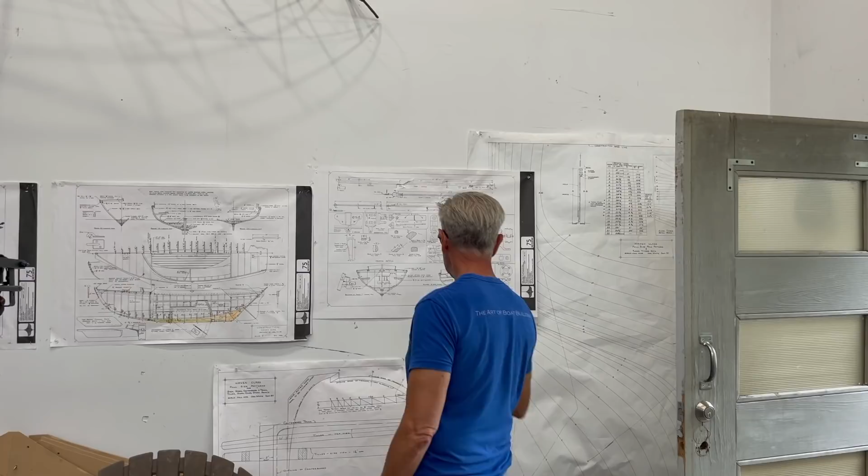So over here at the plans, there are 4 different views of the seats, and the first is here on sheet 6. We're looking forward here, and here are the seats on the front bulkhead, the seat brackets. And then over on this one, we can see where we're looking aft, and there are the seat brackets here.

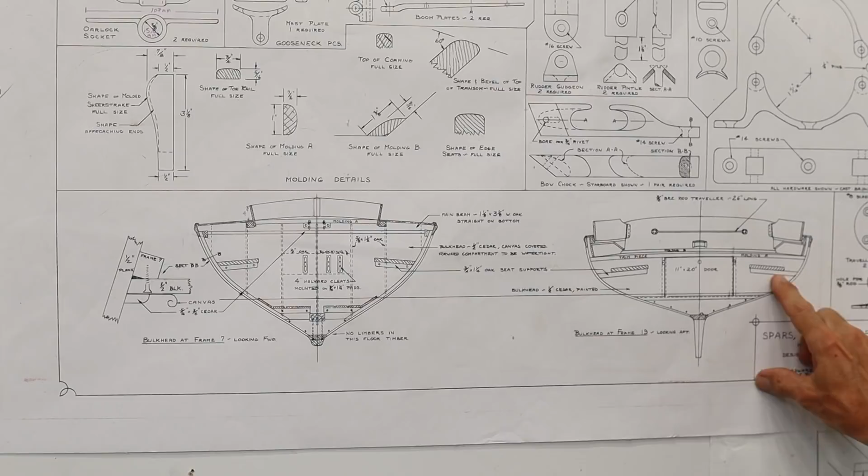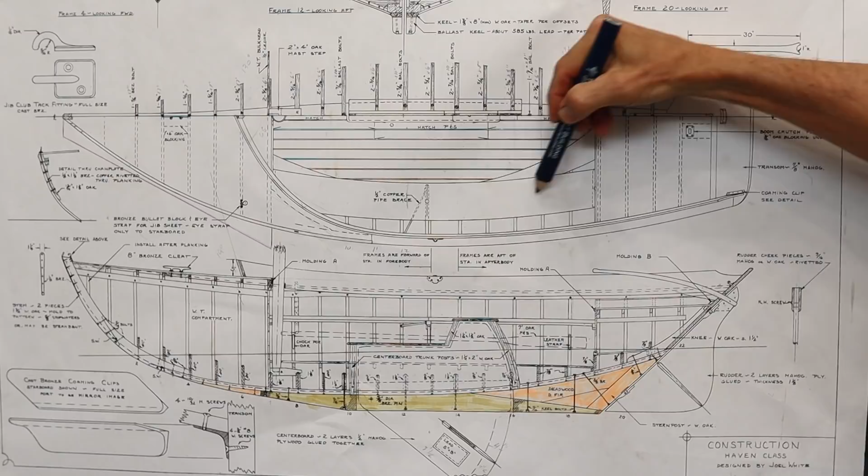The other views are here on sheet 5, and we can see the elevation of that seat. So the seats are this line that runs right across here. And then here in plan view, we can see that this is the seat that runs fore and aft.

The next view we can see is also on sheet 5, and that shows here a section at midship where it shows this bracket right here that holds the seat in the center.

Now, one of the challenges about boat building that I really enjoy is having a problem that you need to find a solution to. And so the trick here is finding the solution of this angle in reference to the hull. And in boat building, it's very hard because there really aren't a lot of right angles. So I think what I'm going to need to do is to establish some kind of a line across there that I can then measure that angle.

So the way I'm going to do that is here on the plans where it shows those brackets on the front and back bulkheads. So if we look back here at sheet 6 that shows the front bulkhead, what I've done is I've established that the floor is level, so I drew a red line here, you can see on top of the floorboards. And then what I did is I drew a line here that is the angle that the seat will be, and that reads 5 degrees.

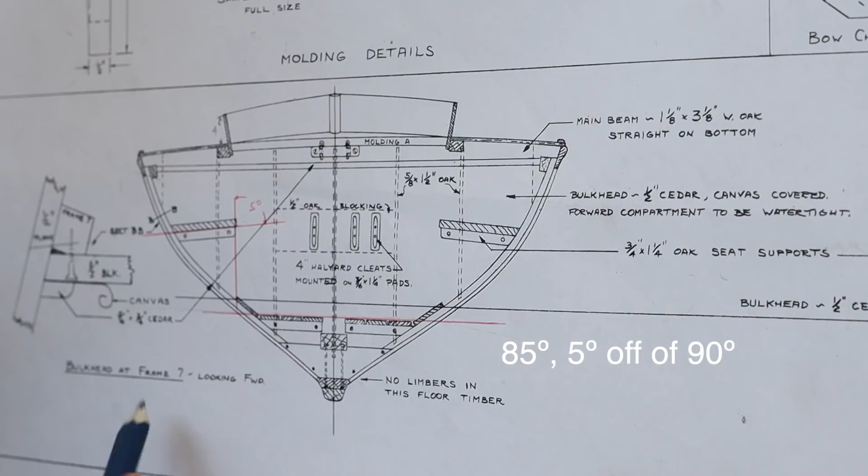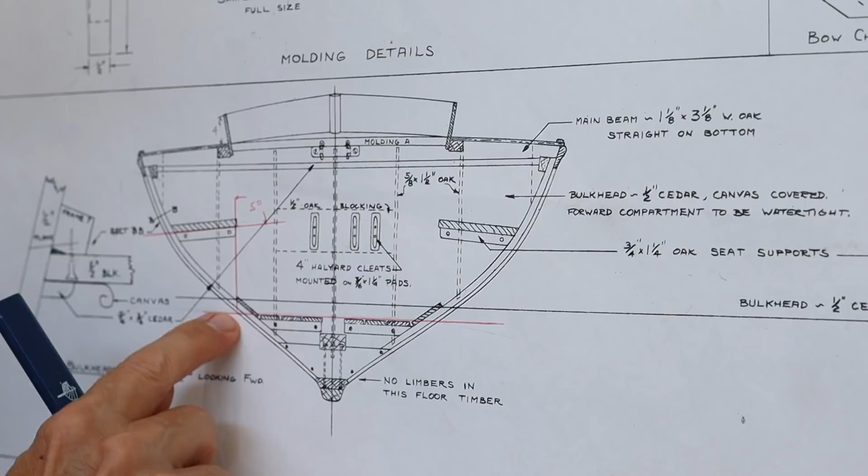So what I need to do now is to establish the distance from here to the top of that bracket, and using the 1.5 inch to a foot scale, you can see that that is 12 inches. So because the seats are parallel to the floor, that will be exactly the same on the back bulkheads as well. So what I need to do is to prepare these brackets that I can attach to both the fore and aft bulkheads. And it says here what size those need to be.

So they are 3/4 inch by 1.25 inch oak seat supports. So the first order of business then is to prepare that stock and get those attached at that 5-degree angle on the front and aft bulkheads.

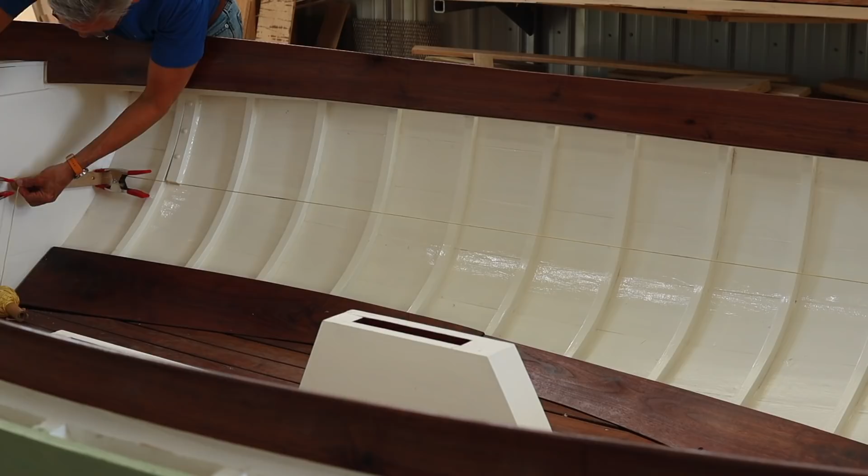So what I've done here is I've strung a couple of strings from the fore and aft seat supports in order to figure out what this angle was here in the center. So I made a template here that will measure that angle for me.

So here on this frame, it will get screwed through the top into the frame, and it'll be flush with this. And then the top of the bracket is equal to the bottom of the seat, which will sit here. And then it will get attached with screws going this direction. And then I just kind of got a general idea of what that curve should be. So now what I'm going to do is go over and work out a jig in order to make this seat bracket.

So I have my template here, and I've decided, instead of trying to steam bend a piece of oak, what I would do is laminate a seat post. And the reason for that is the pieces of oak that I have don't look very stable. And what I mean by that is, in order to make a bend that severe with a piece of 3/4 inch oak, the grain really needs to be very, very straight. And looking through my stock, I just couldn't find anything that I knew was going to be successful steam bending.

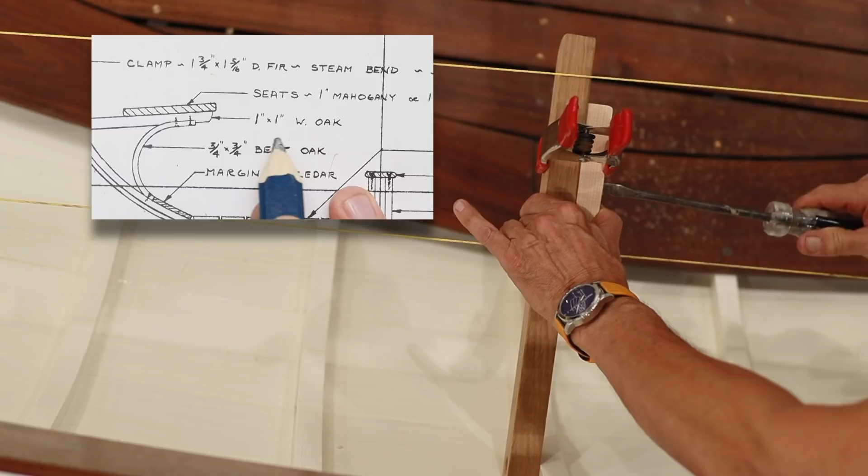Well, after I got all of the seat posts shaped and installed, the plans then called for a seat cleat that goes across midship. And the plans call for a 1-inch by 1-inch piece of oak. So I cut out a piece of that and installed it. And then it also called for a 1/2-inch piece of copper tubing to run diagonally in order to support that bracket fore and aft. So I made a piece of copper tubing up and got that installed.

So now that I've got all of that done, I've cut some really thin pieces of plywood here as templates, and then I've cut them in 2 pieces like this, so that I'm going to make the seat in 2 pieces. And I then mark out where the plans say that the front and the back of the seat should be at each one of these cleats.

So now what I'm going to do is to put a little finish nail at each station like this, and then use a batten to string on here like so to get that marked out. So then I'll have a couple of patterns so that I'll know how much walnut to glue up for the seats.